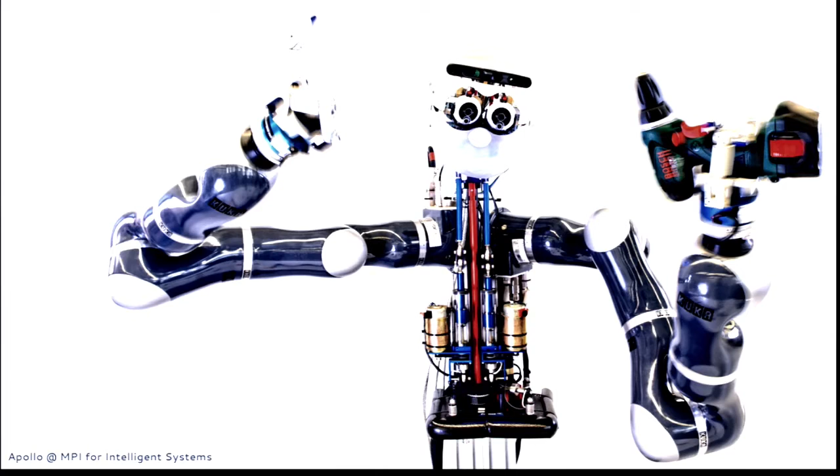My research is driven by the puzzle of why humans are actually so amazing at manipulating any kinds of objects, while it's so incredibly hard to make it work on an actual robot. We don't know yet how, and it's just a very intriguing puzzle for me. I'm really wondering what's the ingredient to that magic sauce that makes us humans, that will finally enable robotic manipulation to reach a level where they can actually be helpful to humans.

That's, by the way, the Apollo robot, which I worked on at MPI, which I miss dearly. It had to stay in Germany, unfortunately.

Today I have a bunch of different thoughts about what could make robotic manipulation reach the levels of human manipulation capabilities. But today I want to focus on this one point, which is on embracing uncertainty. So what do I mean by this?

Let me circle back a little bit and talk about maybe what I don't mean by this. What I noticed in computer vision research and also in machine learning research is that there is a lot of focus on making a visual task or a prediction task as precise as possible in terms of accuracy. In computer vision, that's preferably maybe a per-pixel segmentation over the entire image, or maybe a point in a point cloud, or maybe you want to predict every single thing that's going to happen at a very distant point in time.

So I'm realizing that especially computer vision and ML right now are very obsessed with accuracy, and that's of course a very interesting and extremely challenging problem. But I also want to say that maybe we will never achieve perfect accuracy, and if we accept that premise, that we will never achieve it, then I think one way to look at it is that we actually have to think about how we deal with always having a certain base level of error and uncertainty.

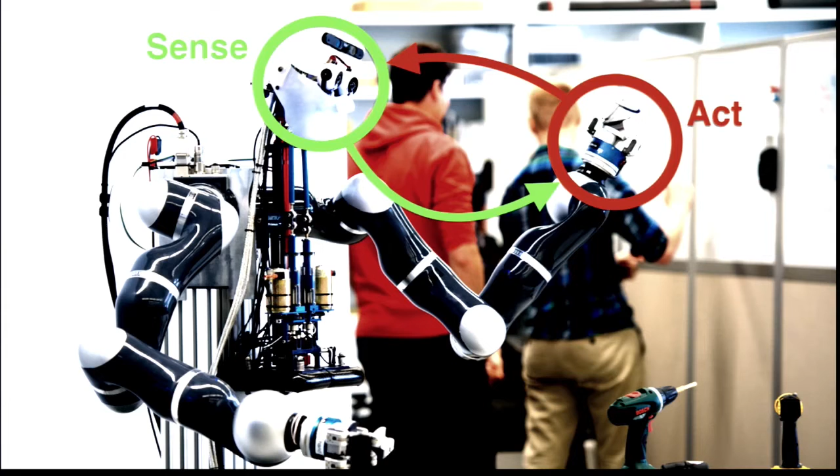So therefore, I would suggest that maybe just accuracy is not the right goal to strive for in robotics, but rather maybe we should strive for methods that can just accept the premise that there will always be uncertainty. Once we've accepted that, we can think about how to develop methods that can continuously replan, for example, and correct for errors. So what we kind of have to do in robotics is close these fast feedback loops, where we basically close a control loop around very messy, high-dimensional sensory data that helps us interpret the scene and make decisions.

And that actually needs to happen very fast. In order to make good decisions, we may not need total accuracy, but rather some way to plan ahead, try things, get fast feedback, figure out if it actually happens, and then potentially replan, right?

So I don't think we need to actually plan everything out, but I think there should be methods that allow these kind of fast feedback loops to run, and then maybe some learning and planning around it that can be redone. So of course, if we accept this, there are still a lot of challenges. We still have to ask: what is the important information that we need for a particular task? And how off can we be, or how much inaccuracy can we actually accept?

One message that I just want to leave in this room: I think if you work on a real robot, you have to really say goodbye to perfectionism and total accuracy, especially in perception and prediction. If you want to come to robotics, you really have to embrace this kind of chaos and accept the fact that everything is uncertain. And now that we, maybe I hope you too, accepted this premise, we can work on controllers and reactive planners that can continuously adjust.

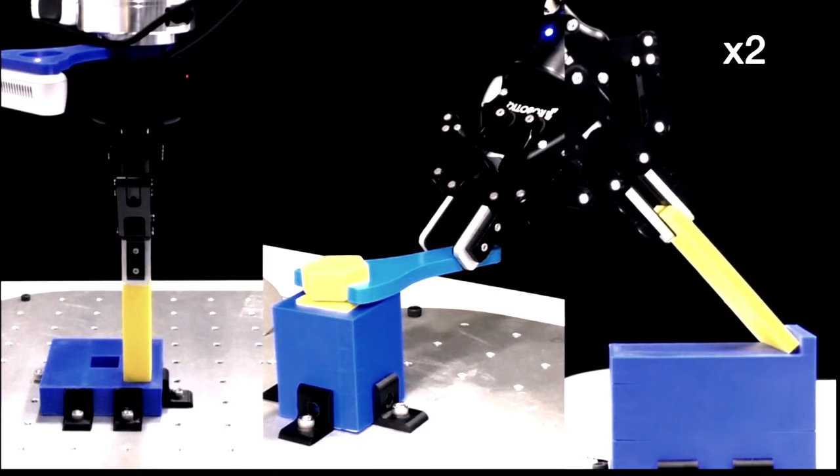Let's start with the first one, on scaffolding manipulation skill learning. First I'm going to show you these 3 different tasks that we considered: peg insertion, turning a wrench, and doing this shallow depth insertion — like a robot inserting the battery into your phone, for example. It's really challenging to learn these tasks. You can do it with maybe a deep RL approach, but you will need many, many, many samples to actually be able to learn this.

What we think about is that one way to approach this is not to try to come up with better perception models or better maybe model-based prediction methods, but to somehow sidestep this issue and ask ourselves: can we actually place physical scaffolds in the environment and find out how to do this optimally to help this robot learn faster?

And this is actually a task that people have figured out a lot. Just think about how people build buildings — they use scaffolds to temporarily support material and get access to heights and axes. Some parents use training wheels to teach their kids how to ride a bike. And in industry, it's also pretty common to have fixtures in the environment to reduce uncertainty in manipulation tasks. So our goal in this project was really a framework for a robot to autonomously discover how to place these kind of scaffolds, or how to help one robot by scaffolding to learn manipulation skills more easily.

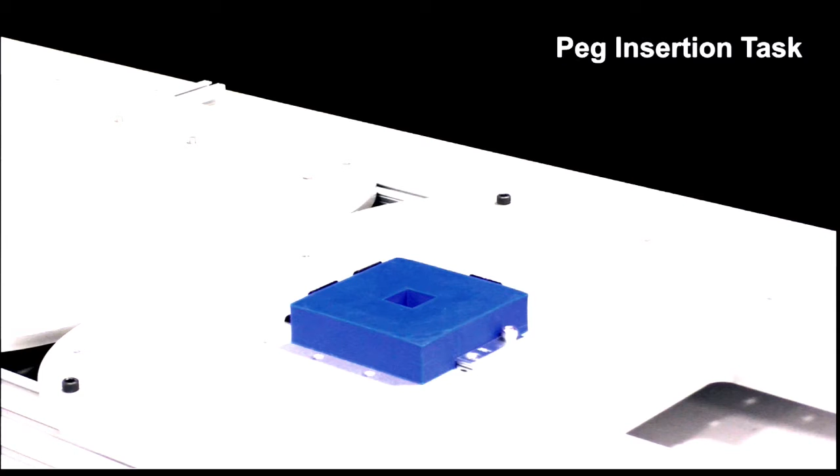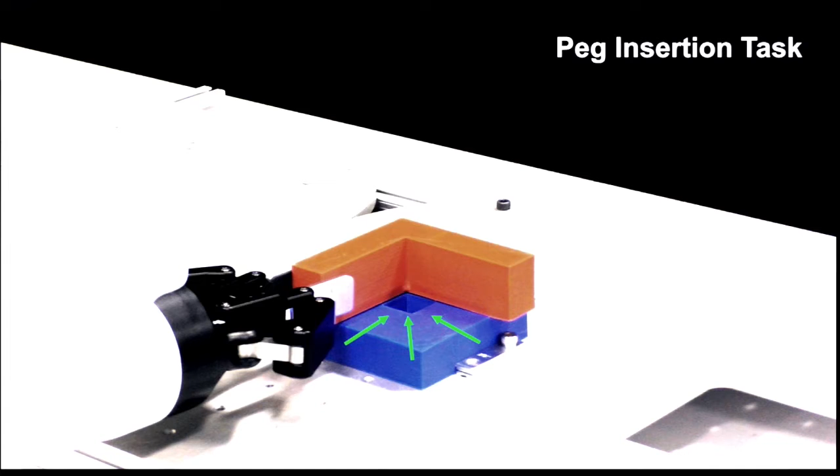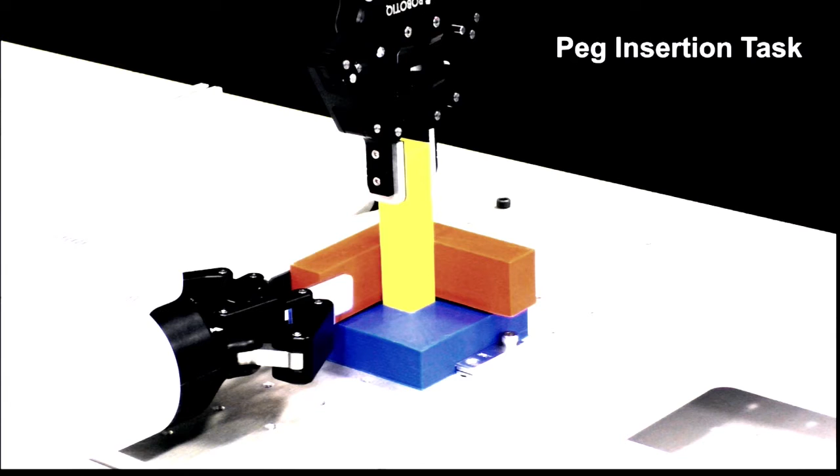So take the peg insertion task as an example. It's a difficult problem to actually smoothly insert the peg, right? Because you have to figure out the right direction — it's very low tolerance actually. But if you have now one robot that places a fixture here, then that really funnels the uncertainty that you may have from perception, and this other robot will just not be able to slip out of this perfect positioning.

And of course now the question is, how does this robot figure out what the optimal positioning actually is? And so the way we approach this problem is by having an inner and an outer learning loop.

So in the inner loop, you have this particular robot trying to learn to do this manipulation task. It's getting this RGB image, and it tries to learn a policy for choosing the next best action. And it has this particular learning curve.

And then on the outer loop, we have basically this robot trying to figure out how do I help this robot learn better by placing this fixture. It sees this depth image, and once it places the fixture in a certain way, this robot will try to learn it.

And the inner loop will give the outer loop a reward on how fast it actually learned that. So the inner loop is actually not so interesting. We just use an off-the-shelf RL method. What is actually more interesting is how we formulated the outer loop.

We framed this as a contextual bandit, where the context comes from this particular depth image that the robot sees. Then the robot has to make a decision on how to place the fixture such that the reward is maximized. Reward maximization here means that this robot learns faster.

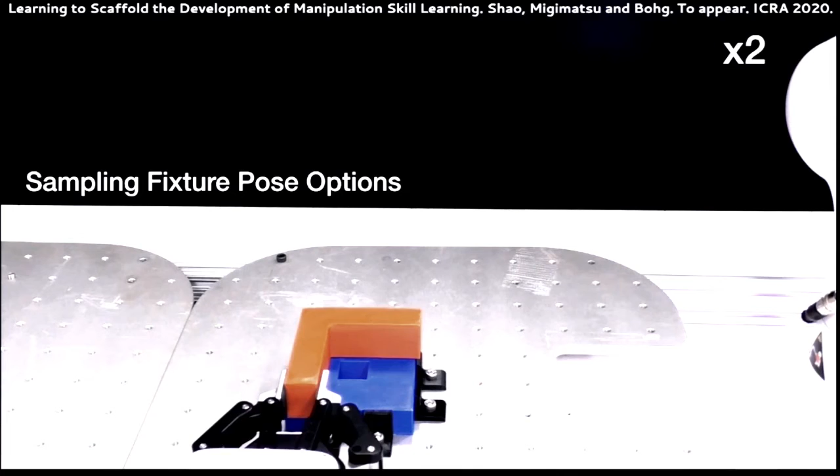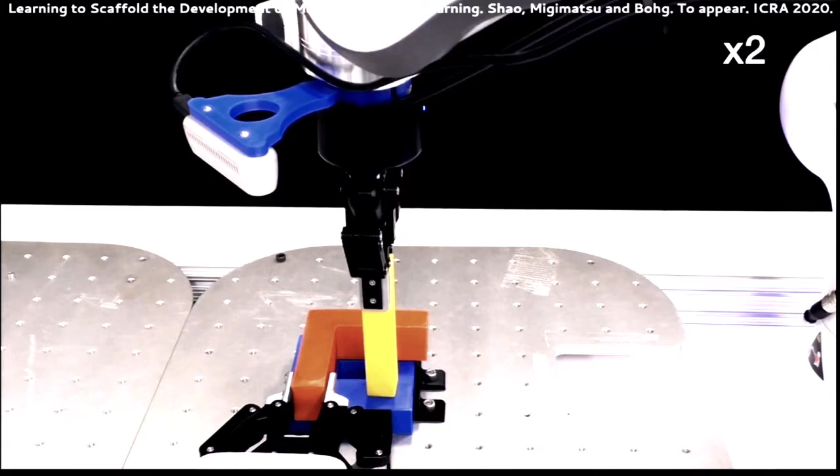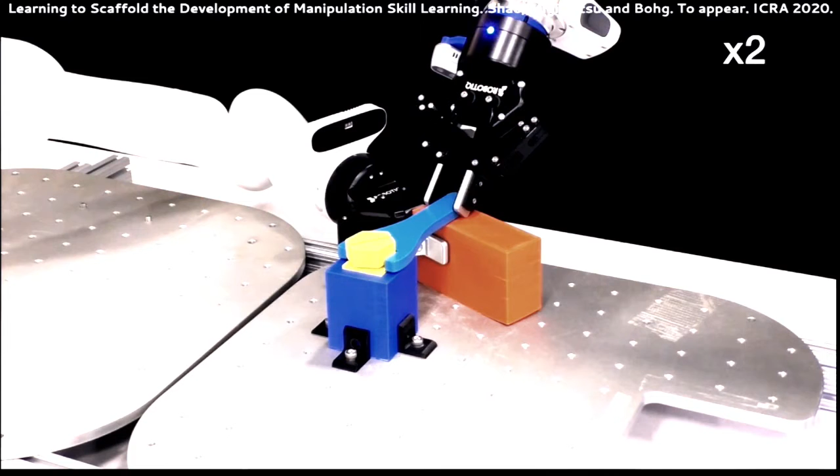So how does this then look like at test time? Here we have the helper robot sampling a bunch of hypotheses of how to place this fixture. We use Qt-opt to home in on this, and then we have the other robot executing that learned policy. This is a different manipulation task where we place this constraint so that this wrench is not moving up and down, so it also becomes much easier to turn the screw.

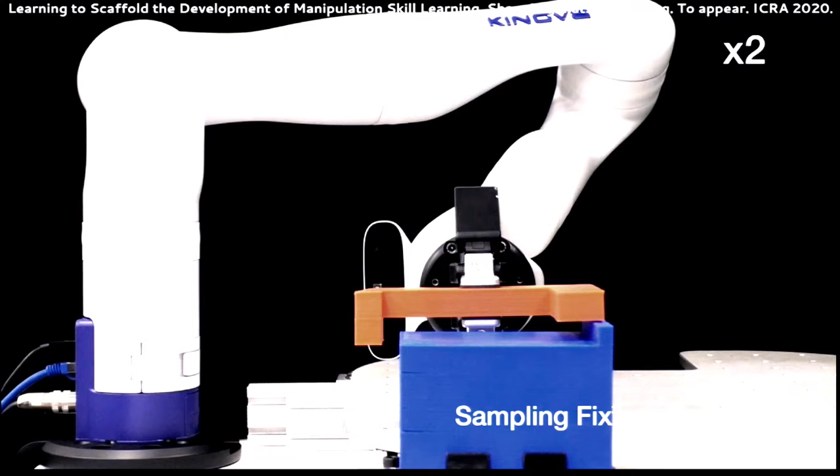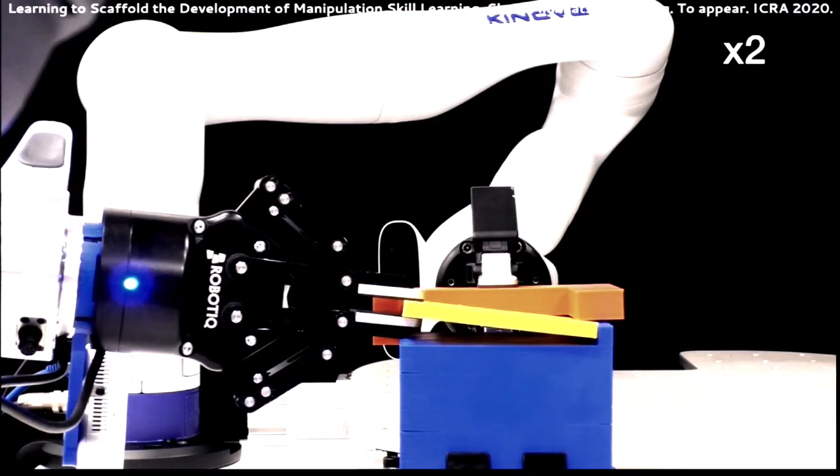And we have the shallow depth insertion as well, where the robot figures out how to best place it. This is actually a more complex task where the robot then also has to slide away from this without basically removing the battery again.

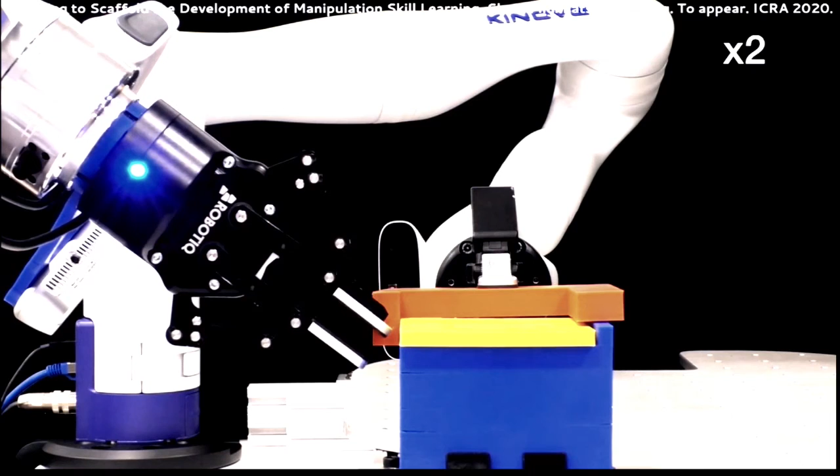Just to summarize this one of the three ideas: instead of trying to become better at perception and decrease the uncertainty about where this particular hole is, we thought, how about we place a fixture in the environment so that the uncertainty in the manipulation task is funneled to something smaller. What we found is that this dramatically speeds up the learning curve for the learner robot. We had an algorithmic contribution where we proposed a smooth zooming algorithm for learning a discontinuous Q-function, and the learning is sped up for the learner robot.

So again, that was one of the three example projects I wanted to talk about: instead of trying to explicitly decrease uncertainty through improving perception, we actually manipulate the environment to funnel uncertainty.

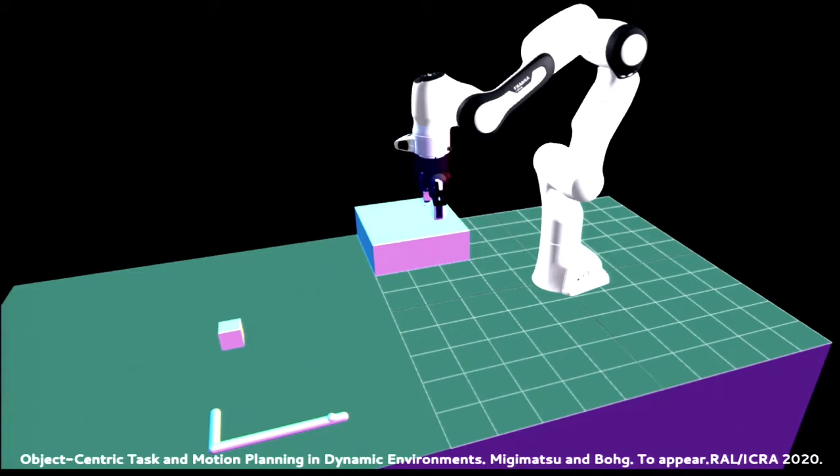Another project I want to talk about also deals with uncertainty, but this time it's about the dynamics of the scene. Specifically, we're looking at the problem of task and motion planning. Here we have one of our robots, whose task is to move this cube that is outside of the workspace of the robot onto the box. It has to figure out that it has to use this hook or tool to get this closer. So what's required is some symbolic reasoning and also some geometric reasoning to figure out the trajectory.

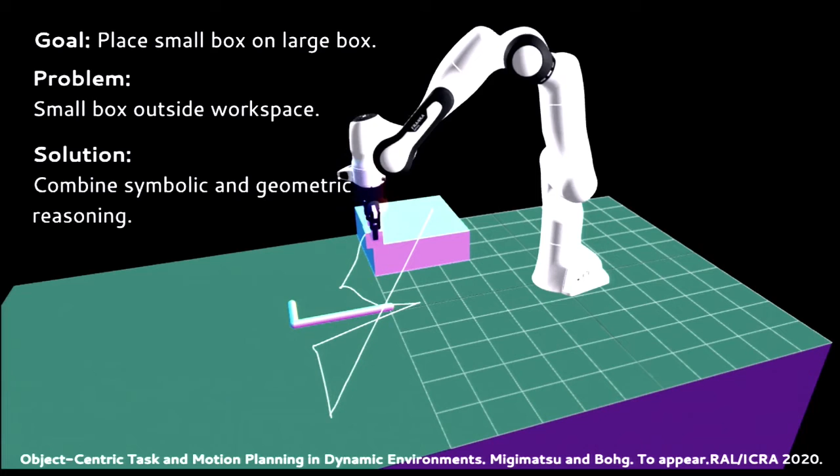So this is what we want the robot to figure out. Now, there has been work on this before that combines symbolic and geometric reasoning, especially with trajectory optimization. But we wondered, how can we actually bring that kind of work onto a real robot where there is uncertainty through perception, but also things might be moving around? How can we deal with this?

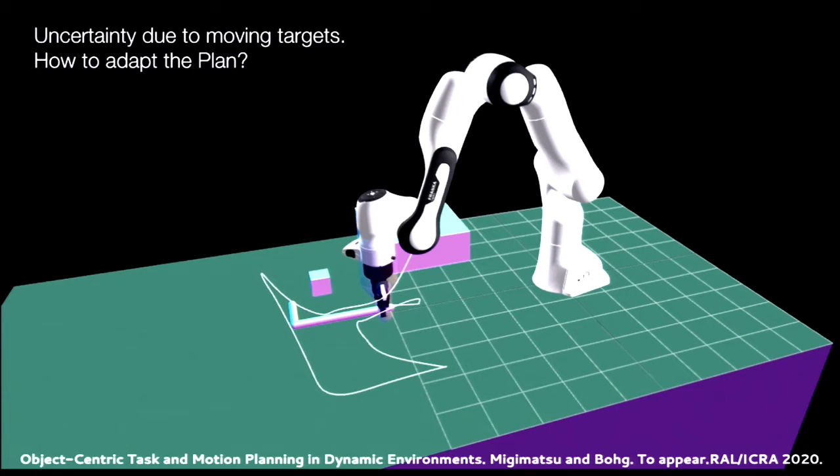Here you see that the robot is being annoyed by someone, Toki in this case, perturbing the environment. So what we basically wanted to achieve is a framework in which the plans stay valid despite the environment changing. This is basically the overall approach that we took.

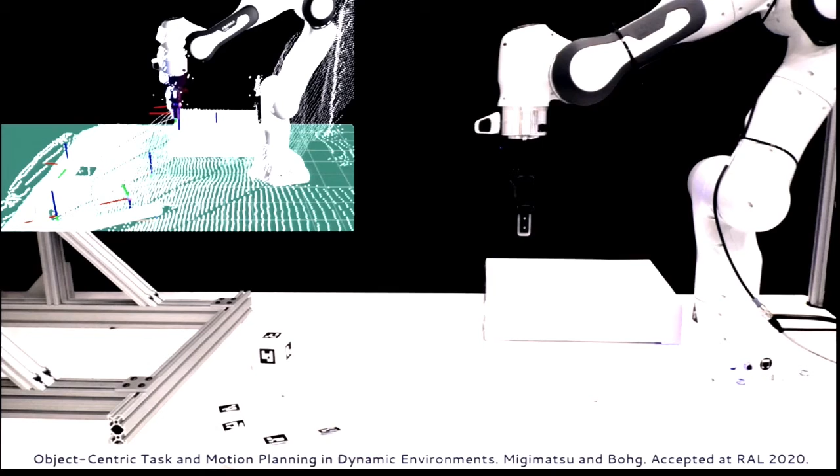I always like when things work on an actual robot, so here we made this whole framework work on a real robot. We combined some model-based perception for visually tracking all of these objects with some markers to make it robust—that's also another future direction.

And then we show how this actually works in the real world, with Toki here basically being annoying to the robot.

So you see this is not sped up or anything—this is in real time. And also there's no learning in this framework, just to be clear.

Okay, so this was the second work I wanted to talk about. The main problem was to solve task and motion planning for dynamic environments. The main idea is that instead of optimizing in joint space, we want to optimize over relative Cartesian frames, and we reformulated this trajectory optimization problem accordingly. I've shown you some examples of what it can do despite the environment changing.

As a third project, I wanted to talk about another manipulation problem, which is the manipulation of deformable objects. I'm just going to show you first what we wanted to achieve.

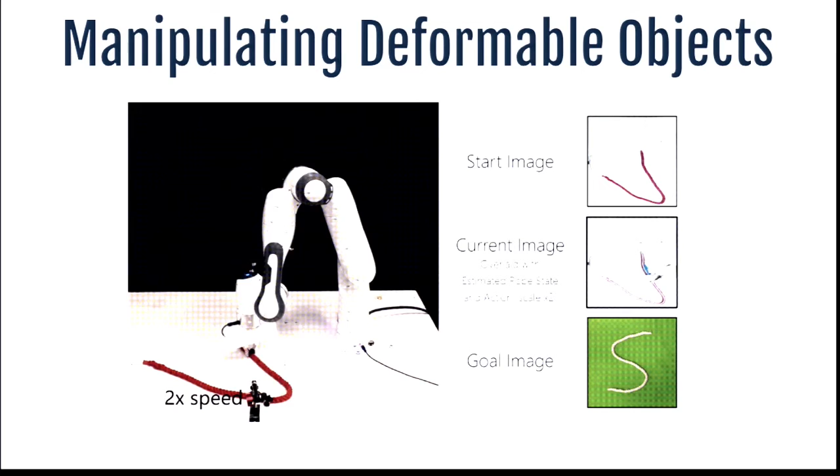So we basically have a goal image of a particular rope, some kind of rope with a particular appearance. Now the robot's task is to really just take its own rope and bring it as close as possible into this shape. So what is the challenge here? There are multiple sources of uncertainty.

One is in perception. We really wanted to have a method that is able to work with all of these different complex possible situations of a rope on a different background, occluded by the robot while it's manipulating with some distractor objects. This is a Berkeley dataset, I guess.

We also wanted to make sure it works with all of these different scenarios. We got a lot of reviewers' comments, so we tried to include as many complex possible scenarios as we can to convince people that this actually works, including cases with multiple ropes. We want to make sure that in all of these different cases, the method actually gives a reasonable estimate of the state, with varying appearance and occlusions.

Another source of uncertainty in this problem is the dynamics of this particular rope. Depending on the particular material and a particular action, there might be many different ways this rope actually evolves and deforms over time. It's very complex. I think we do have models for simulating all of these things, but they're very computationally intensive unless you make a lot of approximations.

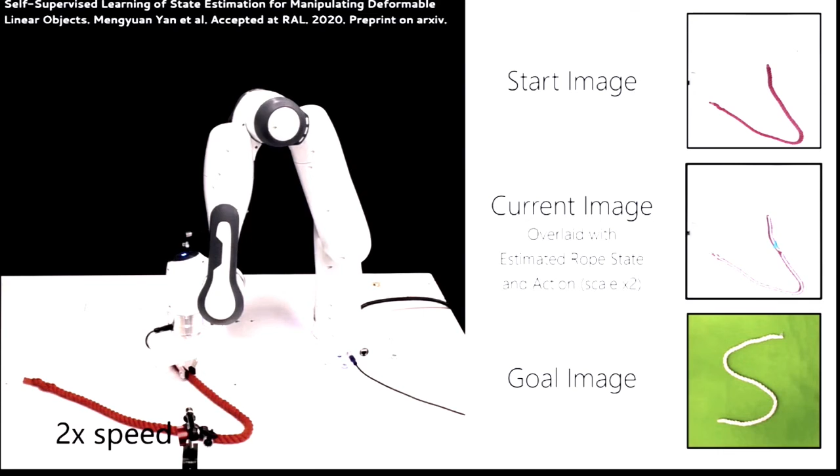Given all this, this is basically the system we achieve, where we give the robot this goal image. This is with a rope of whatever kind—you can even use dental floss, I think, as long as the contrast between the foreground and background is high enough. That's the assumption we make.

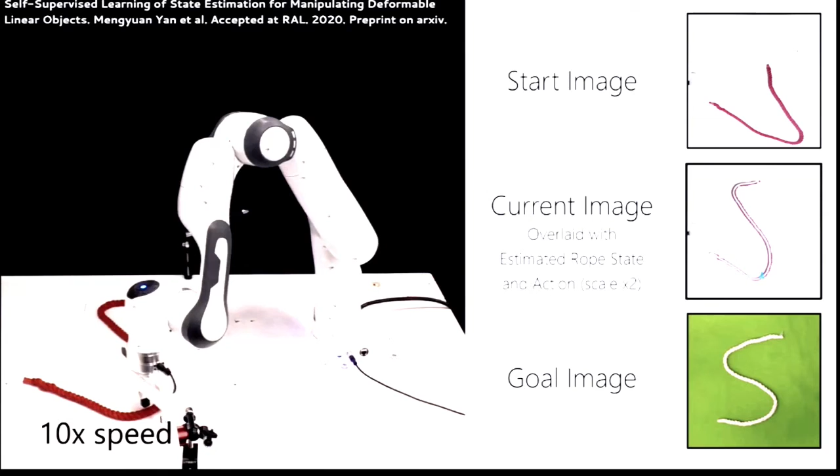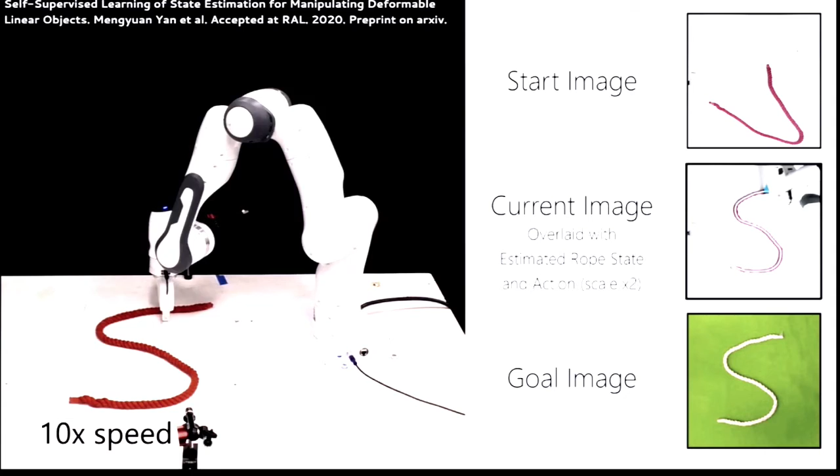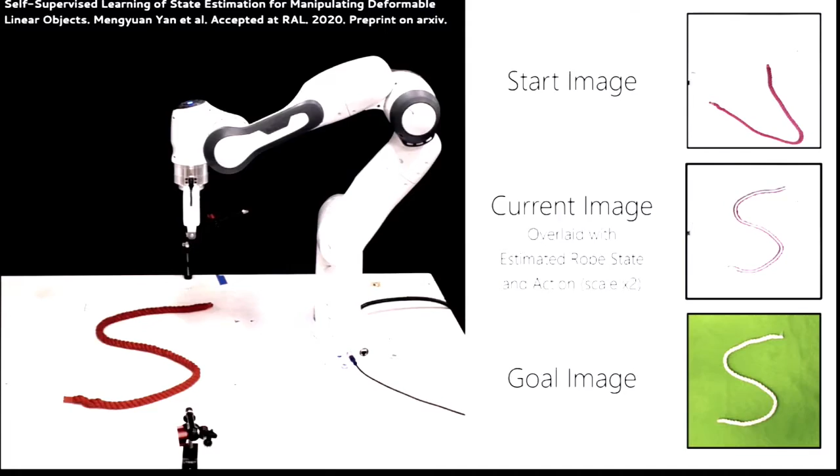So really the robot can move this rope. One thing you can also see is that it has to predict, given the dynamics forward, what a sequence of actions will do. You can see it sometimes uses the weird dynamics of the rope, where pulling here will also move this other part of the rope. I think there are a few examples of this.

All right, so just to summarize this part of the talk. We wanted to do deformable object manipulation, basically moving this rope into a particular goal state on the plane. The main idea, maybe not so special, is that we decided to represent this rope in a normal state space—just X, Y, Z position of these nodes.

The reason this is nice is that you can easily incorporate physics priors into the problem because it's a meaningful representation. You can also do easy planning and easy distance computation. But what is hard, of course, is perceiving the state, which is very high-dimensional. This is where we propose a differentiable renderer for self-supervised learning and robust state estimation. What I showed you was a system for manipulating deformable objects into a given goal state.

So with this, I showed you three example projects, in which we embraced uncertainty by accepting it and dealing with it explicitly. The uncertainty in these problems came mainly through perception, but also noise in execution. Every robot you touch is not going to do exactly what you wanted it to do. There might be a dynamically changing scene, and there might be an uncertain dynamics model as well.

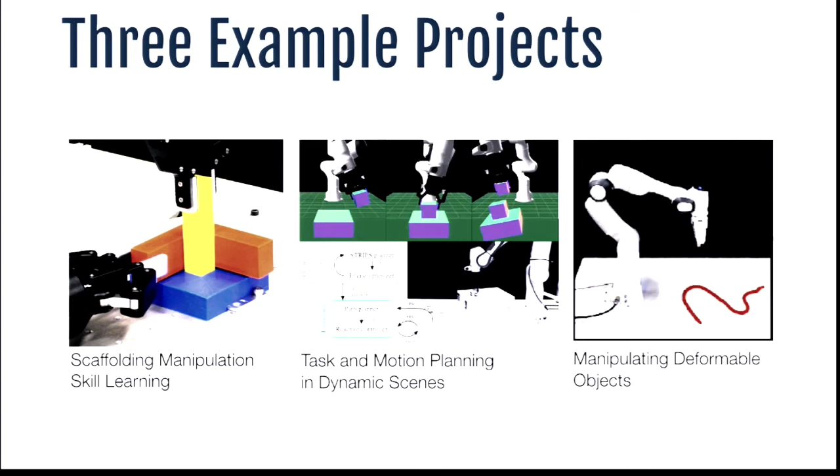So I think in robotics, one way to look at this problem is to not try to achieve the impossible—perfect accuracy in scene understanding and prediction—but instead think about approaches that deal with the ever-remaining uncertainty, either through replanning or by funneling it through changing the environment.

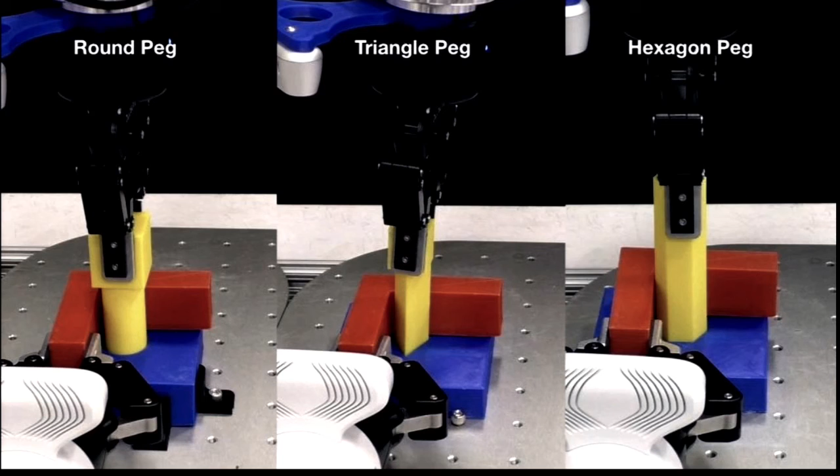And now I really regret having forgotten one of the slides that I really should have added here. Let me see if I... okay. So this is from a different presentation, and I forgot to include this, but this is basically taking the same policy that we learned on the rectangular peg, without knowing anything about its geometry, that it's rectangular, taking it, using the same fixture pose, and then executing it with a differently shaped peg.

Did you extract the round, the geometry, or? We gave it basically. So what we did is we gave... What are you getting out of this? I'm getting out of this that I could do the following: I could try to solve peg insertion in the way where I do model-based tracking of this particular hole, right? And I'm going to do model-based tracking of this peg, and I could do that, and then I could just have a...

Yes, exactly, yes. And I haven't talked about the project we did on force measurements here, it's actually not used in this project. But I could do this, but the assumption I make there is that I know the geometry, exactly the geometry of the problem, right? I know the CAD models of the cylindrical peg or of this triangular peg. If I want to do it in this model-based way, what I gain with the learning-based approach is that I don't have to assume that.

So what we've shown is we can take the policy that was learned on the rectangular peg and apply the same thing on the round one and on these others. What are the variables, say again? In the policy, what is underneath, what are the variables? So for the inner loop, it's a 2-layer neural network. I see, yes.

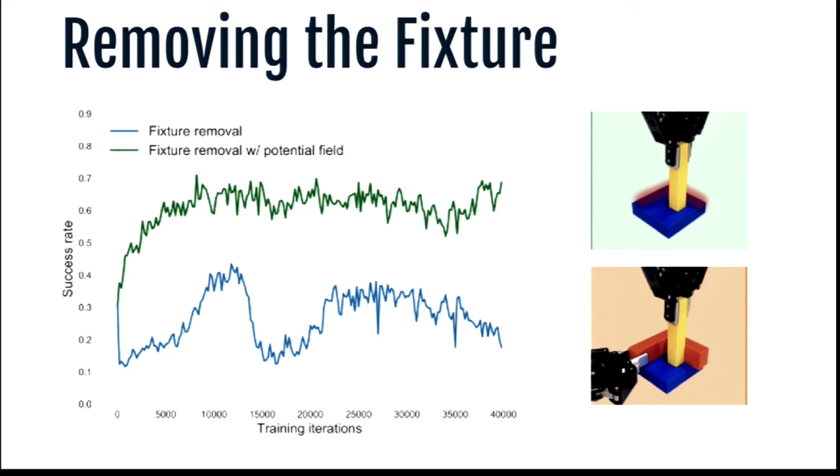What is it? Say again - the last one was what? What is it doing? What does it look like, the final policy? It's basically the final one I think I showed. So let's look at this again - it's basically doing this sliding and wiggling in, right?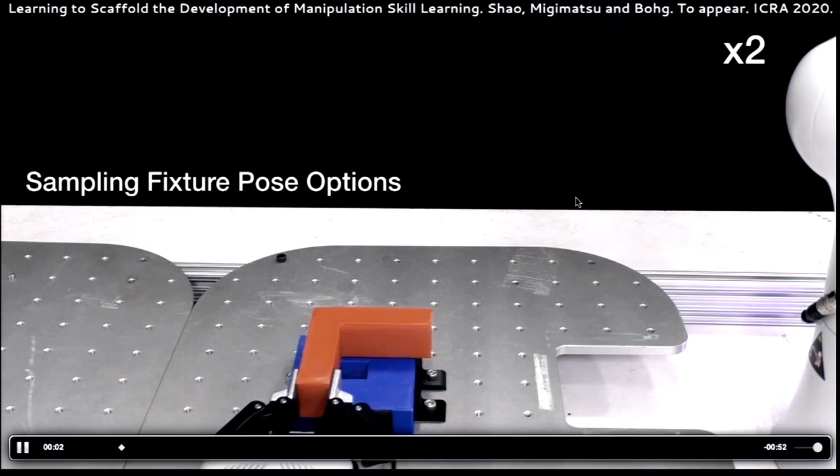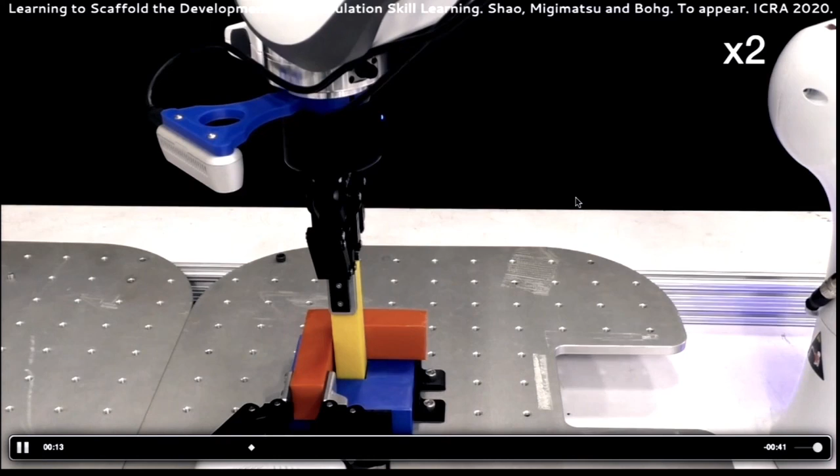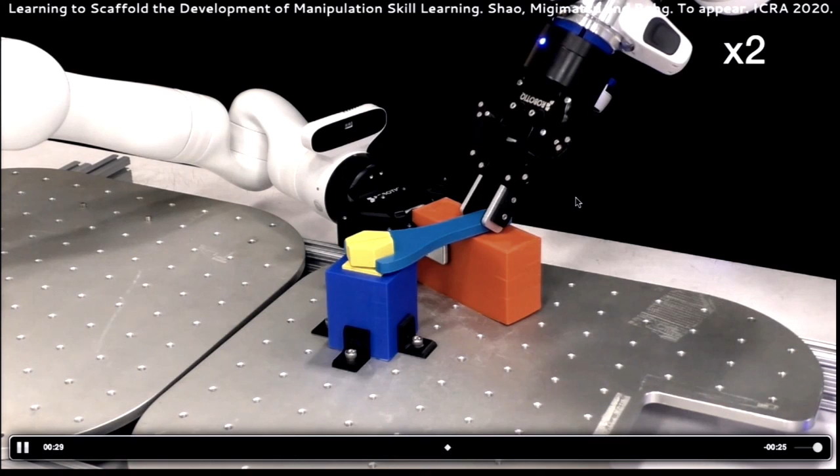So when you do it with your robot, do you use the policy trained on simulation? Yes. Do you have to fine-tune it? No - which was surprising, but yeah, we didn't.

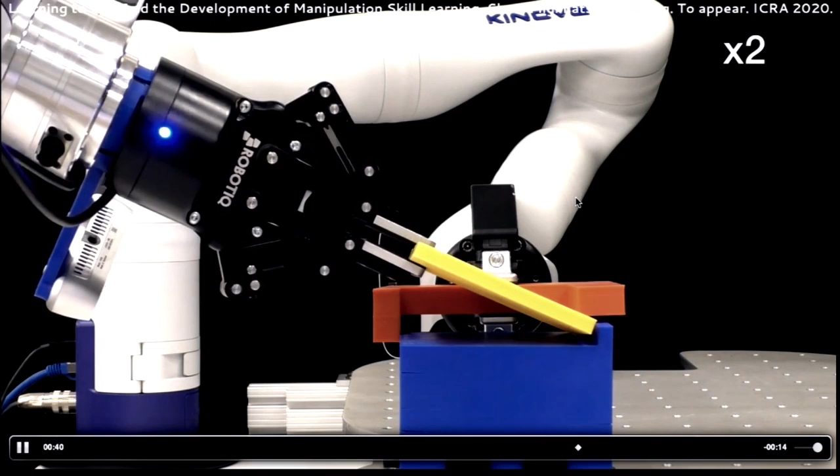When you transfer to the differently shaped pegs and holes, do you use the same policy or do some relearning for that task? The same, because it basically exploits - so we did it only for the peg ones, not for the shallow depth insertion and stuff. But for the pegs, I think it's really just trying to place position maybe inside of the fixture, like impedance control, and then just exploits this constraint, and it just happens to be, for the round peg, it's just the same contact points that it exploits there.

So you talked at the beginning about your ideal situation being to understand the gradient of how humans do this. But little kids are able to do this, hopefully - they fiddle around with it, but they don't actually need these tools or scaffolding to help with this kind of similar task. So kind of how - I don't know, I guess what's your opinion?

Right, they don't need it with maybe similar tasks, but maybe they have larger tolerance, they start with easier tasks. But there are certain tasks where kids are using scaffolding. It's not always physical - sometimes it's just, I think it's actually a term in developmental psychology, where scaffolding is used for learning, and it can be verbal, or it can also be kinesthetic or something like this. I think there are even some sports being learned with physical constraints as well. Some of these things are just easier to learn, but I agree with you, some of these play things you see in kids, they don't really need these kinds of scaffolds. I think it's just maybe a combination of inbuilt priors and just figuring things out and doing experiments.